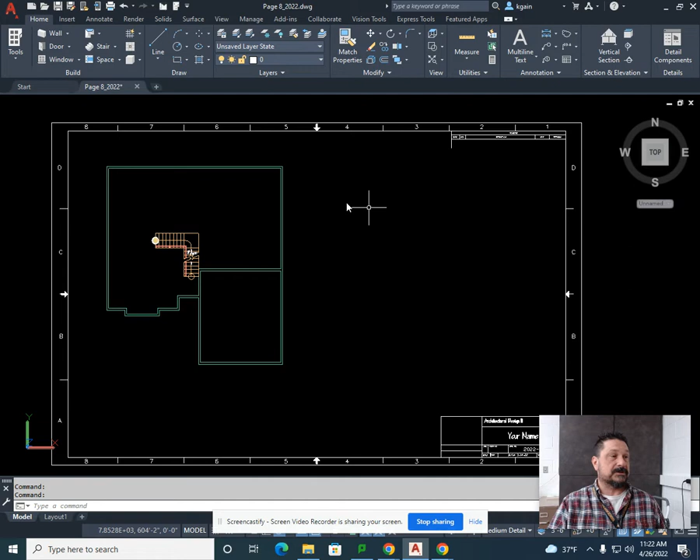So what we're going to do is go into our tools, and in the design tab, or right underneath the design tab, are your walls. So what we're going to look for is our standard 8-inch concrete block wall with a 16-inch footing, or basically the sidewalk that's going to walk around the perimeter of your home that holds the foundation. And if we scroll down, we can see it right here.

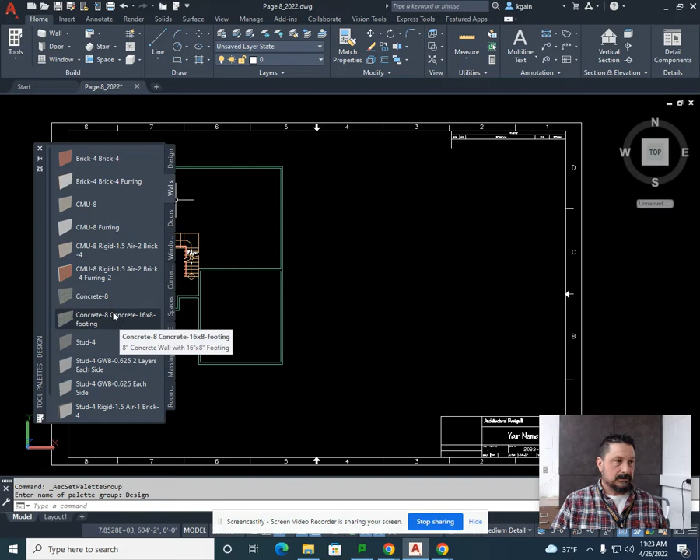Now, as I pointed out the other day, it's also going to be in your content browser if you're more comfortable using the larger pictures: the Imperial, into our walls, and then our concrete masonry units. And I do believe we were scrolling through and hit page 4 when we finally found our 8x16 footing with the 8-inch wall. So we're going to select that and hit insert in the drawing.

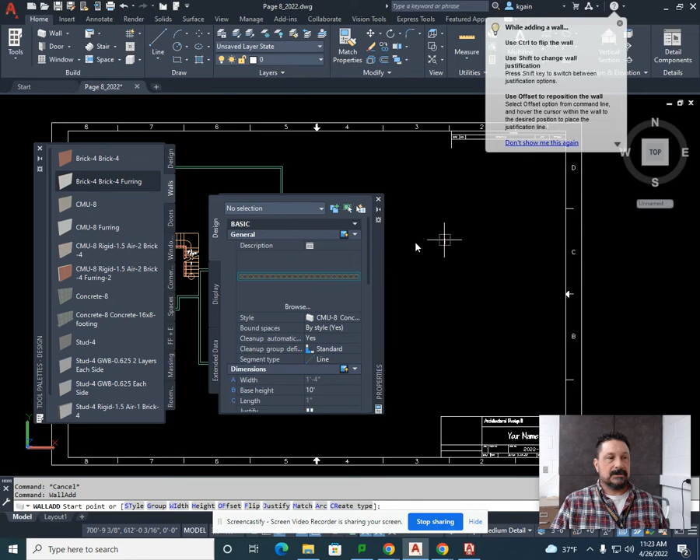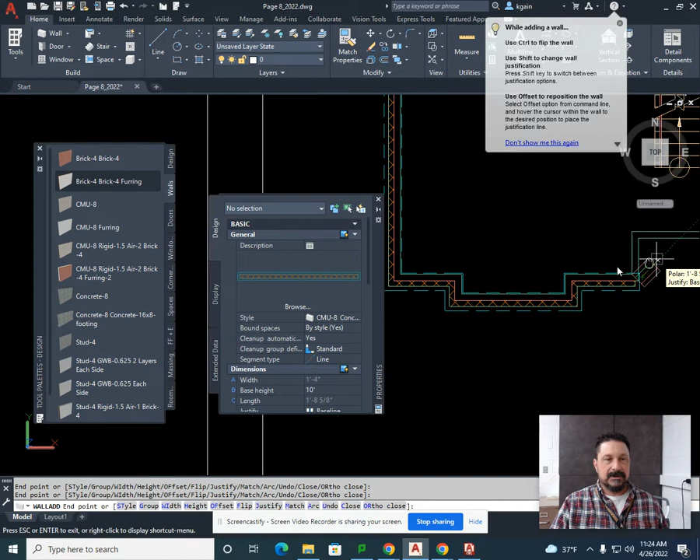Now I'm going to scroll over here and I'm going to trace the perimeter of my home minus the garage. So we went kind of through the garage and determined that really there's no basement underneath the garage. So I'm going to continue this perimeter just for my home. And just like any wall, you get close and you drop and it cleans up.

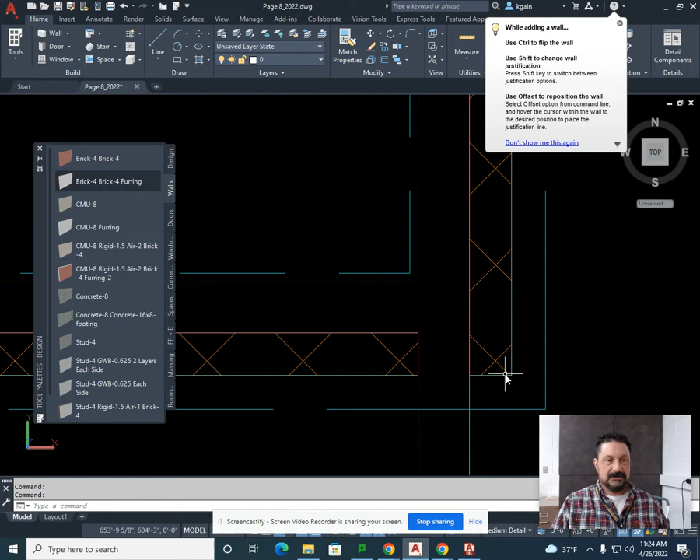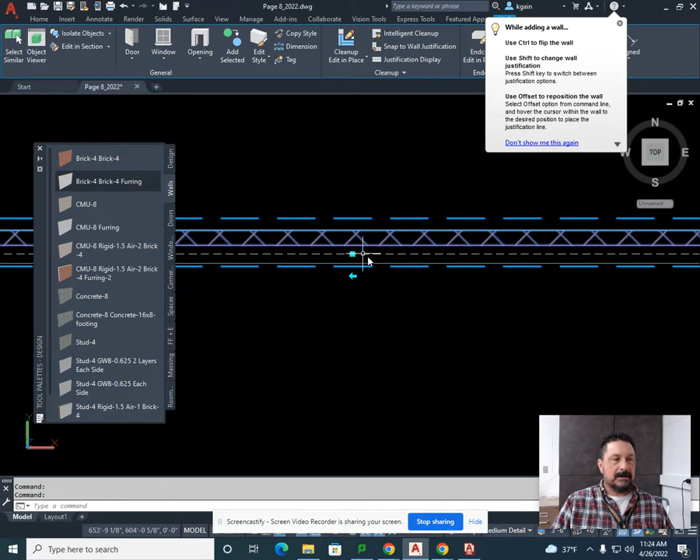Now, it's not perfect by any means. We're going to have some adjustments because the walls are not setting perfectly on top of that block. Your walls should be 6 inches and your foundation wall here is going to be 8 inches. So those are going to need some minor lining up. If they're off a little bit, that's okay. A long time ago when we did the cabin, we had grabbed one of the grips and we dragged it down and we entered a distance.

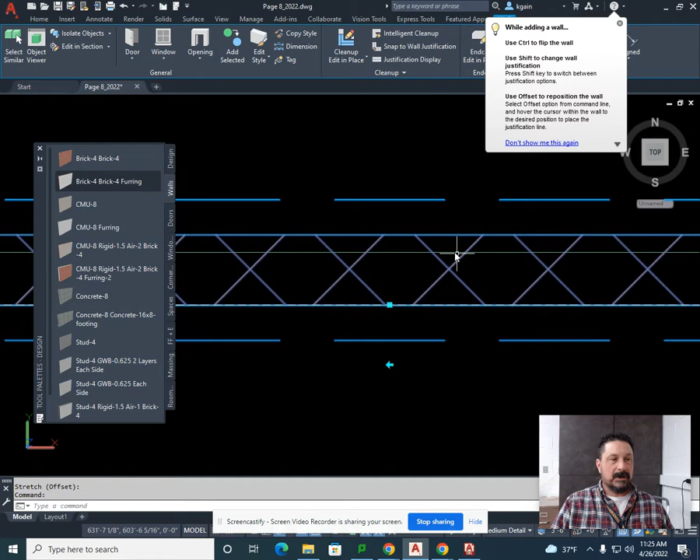So we need this wall to line up with the outside of our 8-inch wall. So it's the outside that's going to be flush, not the inside. So if I click on this and I drag my wall up and I put it on the outside of my wall, you can see that, yeah, my foundation's sticking over. I don't want that. I want it the reverse.

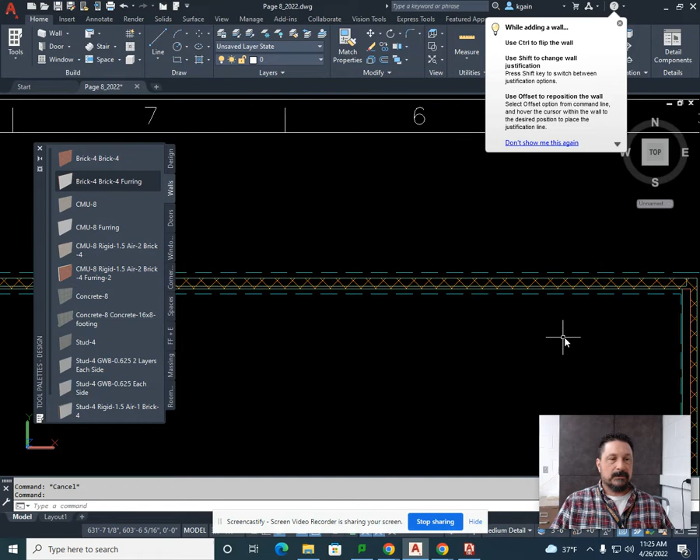So unfortunately, because the grip is on this side, I'm going to have to drag it down and manually type in the number 2 for 2 inches. You don't need the inch symbol, and select enter. And now it's flush with the outside perimeter of the home. And you're going to continue that process through each of your walls.

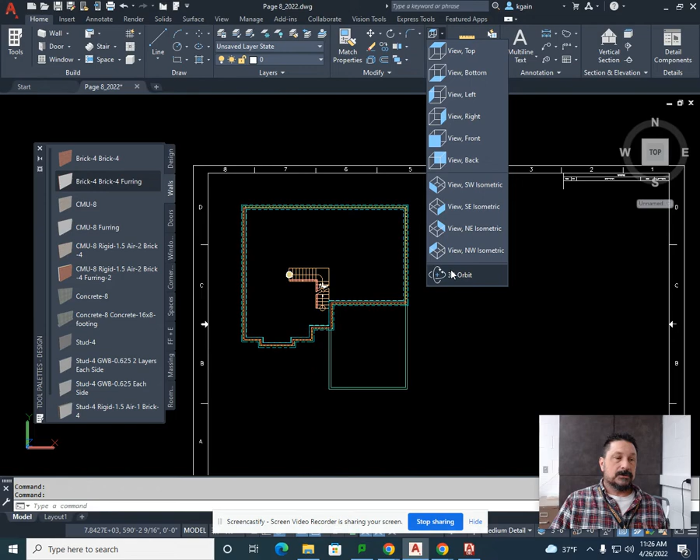So if I click on this and bring it back into my wall and then back it up and enter 2, now my home wall is flush with the outside of my foundation. You do that for all the other ones. After you're complete with that, you can go to a 3D orbit and kind of see what it looks like. Obviously, it's kind of stuck within the walls, and we need to drop it down a little bit just for our viewing purposes right now.

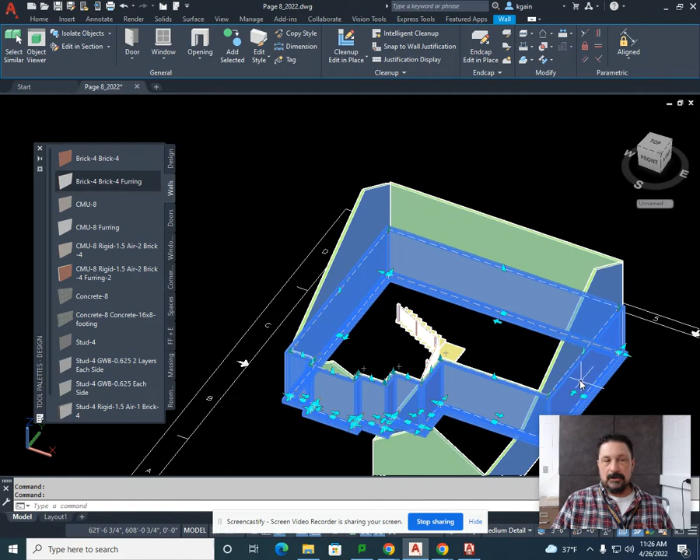So I'm just going to grab all these, and then I'm going to adjust those heights. And if you don't hit them all at once, that's okay. And I'm just going to go to a regular old move, click on this corner, and I'm going to move it all the way down, even with the outside of my home.

Now, if I go to an orbit, you're going to be able to see that it's resting on top of a foundation, and now I have my basement wall. Like I said, keep the stairs. We'll probably end up forming stairs going to the basement from this side, going down one way or the other.

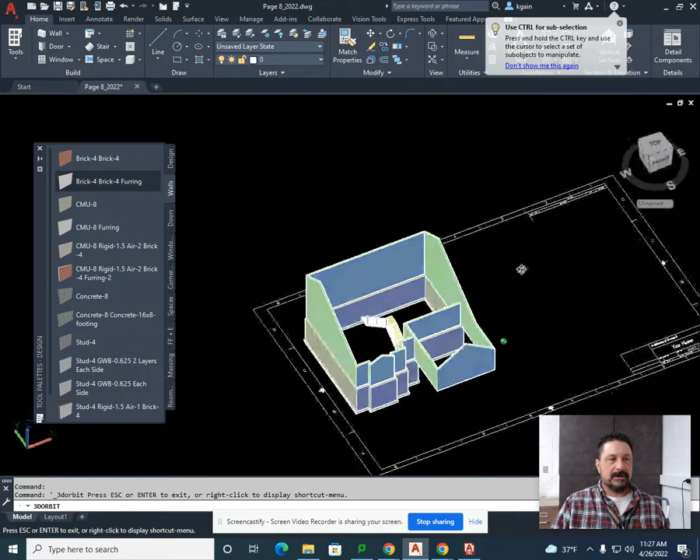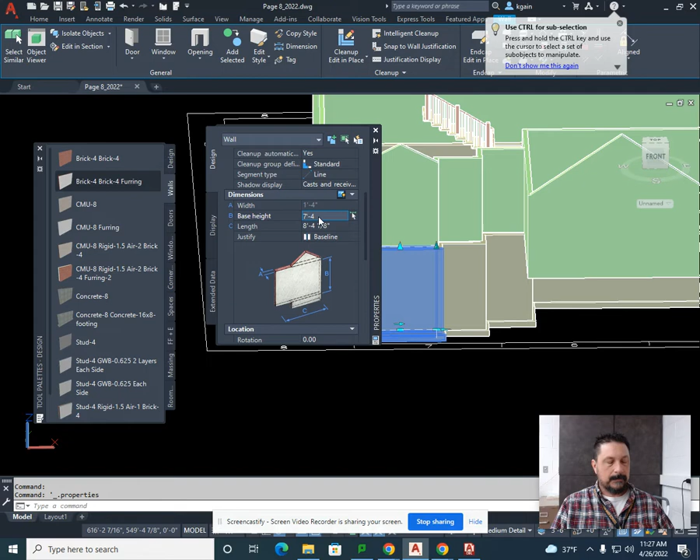Now, the walls themselves, if I double click on any wall, the properties come up, and you can see that we're looking at a base height of 10 feet for a foundation wall. That's pretty darn tall. Okay. If we went the standard basement height, and I mentioned this the last time we met, it is 7 feet 4 inches. And then I'll have to obviously readjust the walls accordingly to meet back up with my home. We'll most likely get rid of the home walls.

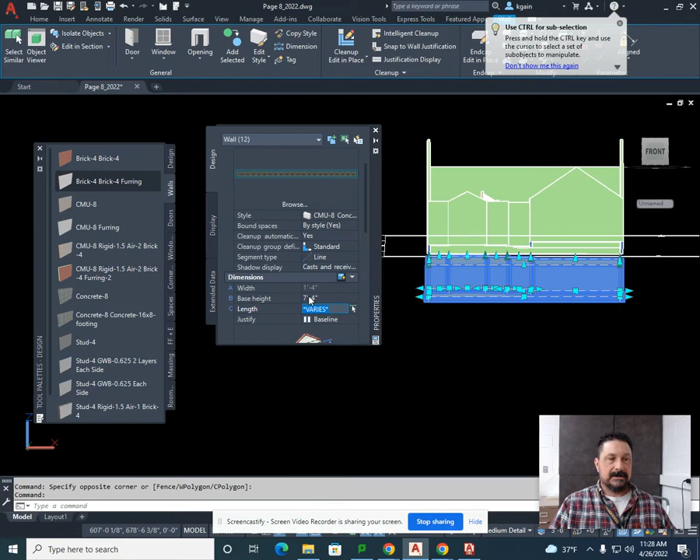So if I went to an orbit or a straight on front view, and I highlight all the walls. Now, mind you, one of them I changed. So when I scroll down here and it says base height varies, I'm just going to click in that field, type in 7 feet dash 4. You could include the inch symbol if you wanted to, if you feel comfortable. I'm just going to keep it at the 4 and select enter. Escape. And they're all 7 feet 4 inches. That's your standard basement height. I would suggest doing that only because for our purposes, it's going to be a little bit easier to form stairs going into your basement.

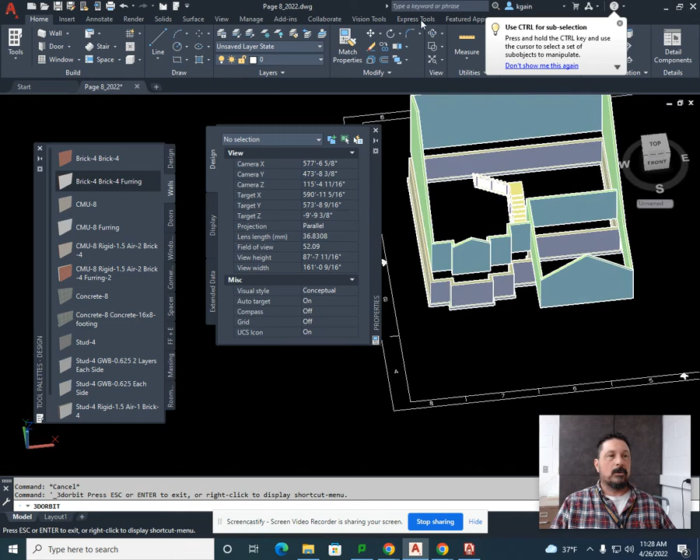Right now, I'm not going to raise these up to the level of my home. I'm just going to go back to a top view and focus on my garage. We talked about how a garage doesn't really have a basement under it. When you excavate or when you dig for a home, you do want that large cavity for your basement for multiple purposes. Things to obviously have some type of living area. If you ended up having an older home, yeah, you got a short basement, but the accommodations that were necessary down there were your furnace, your hot water heater, all your duct work, your pipes, your electric system, your service panel, and so on. So all that had to be housed somewhere, and that somewhere was in that cavity we call a basement.

And of course, over the years, it was, well, we can make this more of a livable space, a rec room maybe, and kind of shove everything off to one side when it comes to the hot water heater and furnace and so on. So this is an important step of having the foundation, having a basement ready to go, because when we meet next, we're going to start talking about where the water heater goes, where our furnace is going to go, where our electrical is going to be run from throughout the home. So there's our foundation walls.

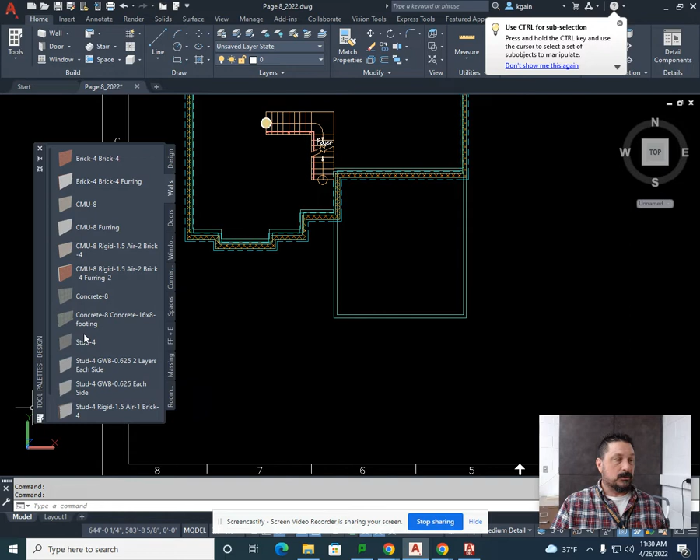Now, with the garage really not being much of anything, what we're going to do is still put a foundation wall, but we're not going to go that 7 feet 4 inches into the ground. But we do need to go into the ground. Now, this time I'm going to use my tool palette. I'm going to come back here, same wall, 8-inch, 16 by 8 footing. And I'm going to drag just around the garage. And once again, don't have to be perfect the first time. We can make those adjustments as we go.

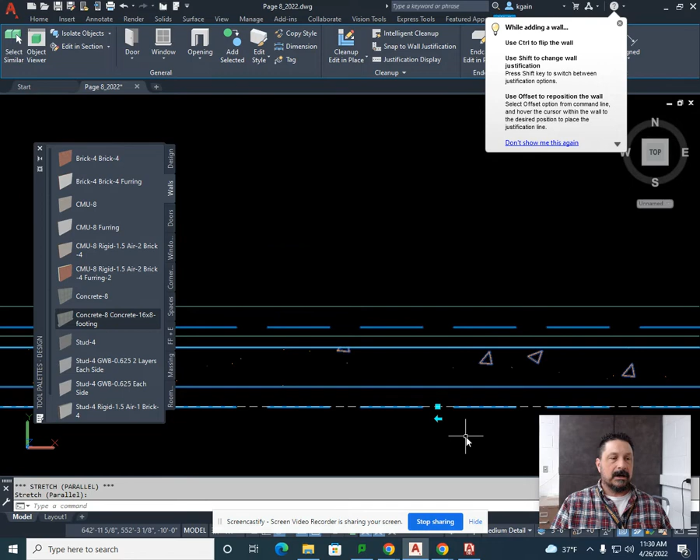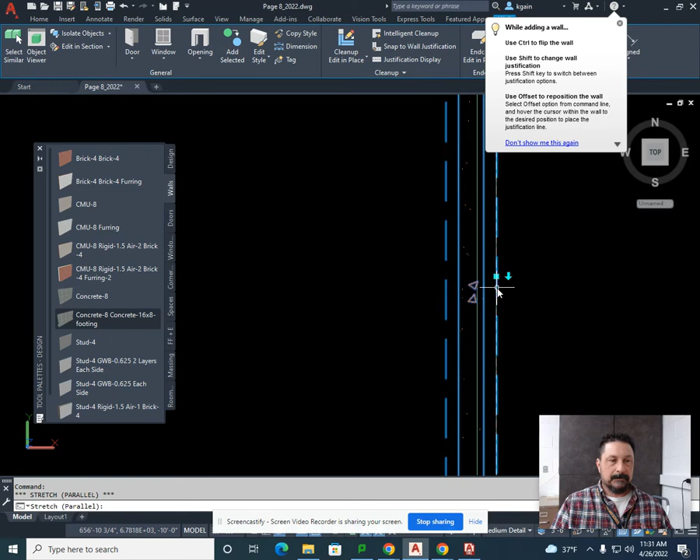Obviously, this would be the same thing. Drag it out, enter your distance of 2 wherever your wall lies. These are justified, looks like, on the outside. So I got lucky with that one. Ooh, that's my wall. So I'm just going to drag those out. Nice. Missed that one. No, this is justifying from the footing, so I'm going to have to drag that out too. Okay, not sure why that was the case. But anyway, regardless, what we're going to do is change these then to a minimum of 4 feet high, and then raise those walls up.

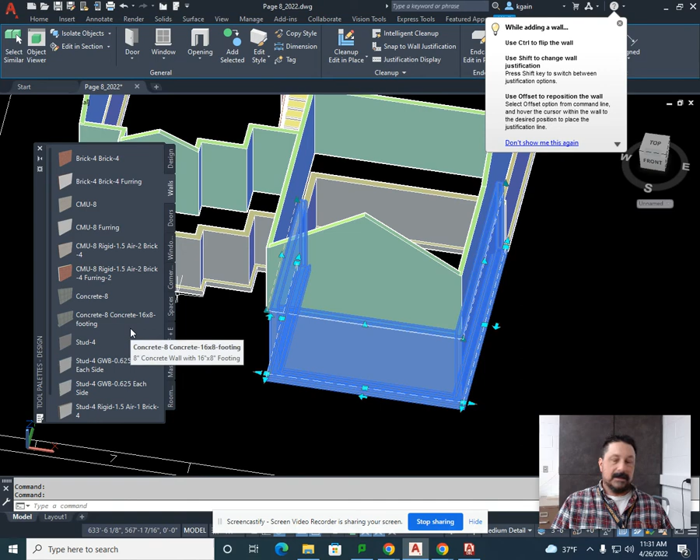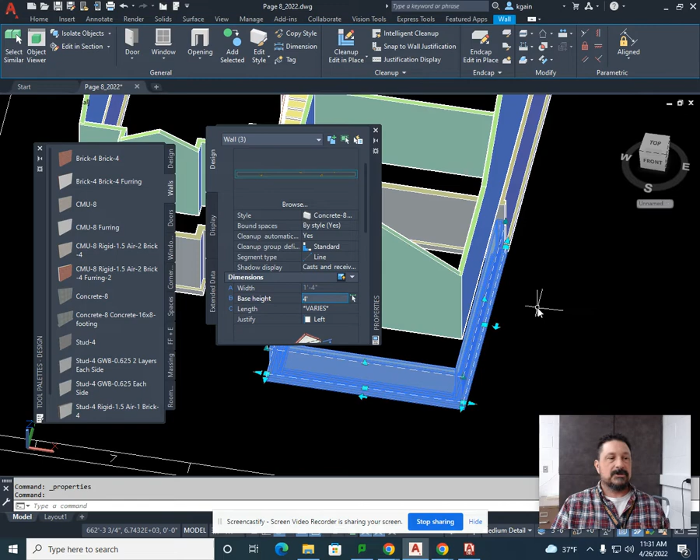So if I go to my right-click properties, or I could just double click on one wall and scroll down, base height now is 4 feet. Now, why 4 feet? 4 feet is the requirement in the Midwest for being below the frost line. With the earth shifting when it comes to ice, snow, heat, and so on, we are below to a point with your footing and foundation for your garage walls that will not allow shifting or cracking if it's 4 feet.

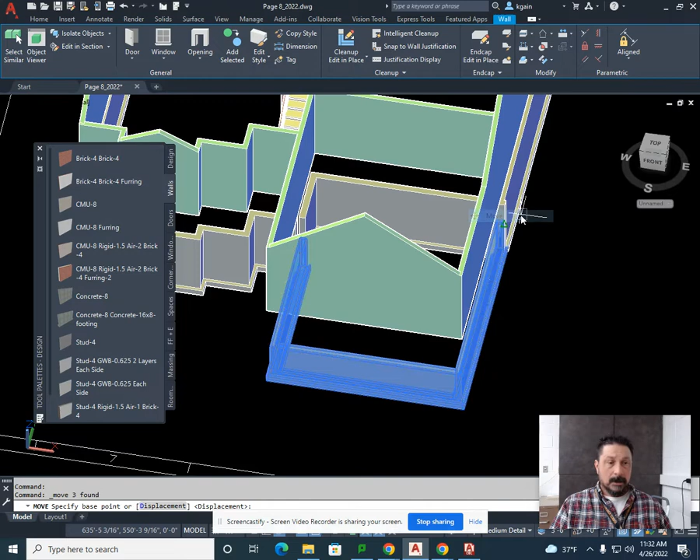This is the same thing when it comes to a deck. A deck you also don't want, and I'm just going to shift it up. It might need some adjustment later. But a deck is the same thing. You do not just put a deck on the ground. You do put posts or a foundation or some type of concrete to suspend that deck above your property. So this is the same concept, is that we have to have some type of footing, some type of foundation to support all the weight that comes with your garage, specifically the walls.

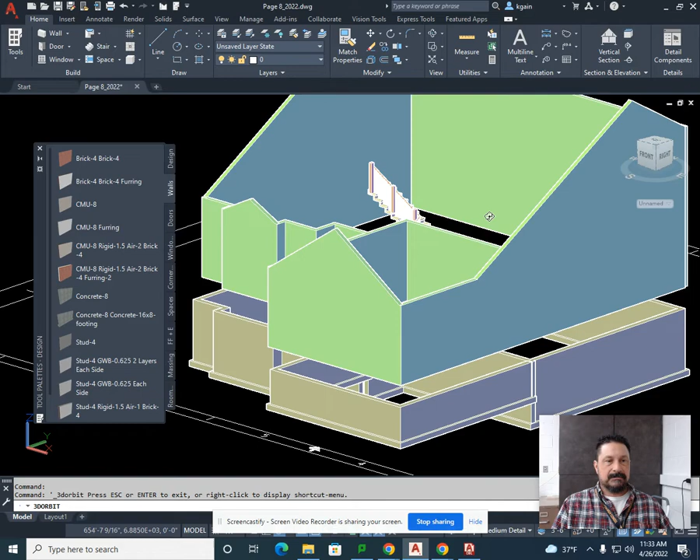Within that area, obviously, you would pour a garage slab right over your gravel base, and that's where you park your cars. But there's never any real true basement, so there'd be a lot of dirt in here after the excavation. Get the dirt back in there, backfill, get the gravel in there, pour your garage, and then obviously we start building the home itself. So there is your foundation for the home.

To move on, and you can pause this video anytime you want to work, but I would expect you to have most of this done within those 85 minutes allotted.

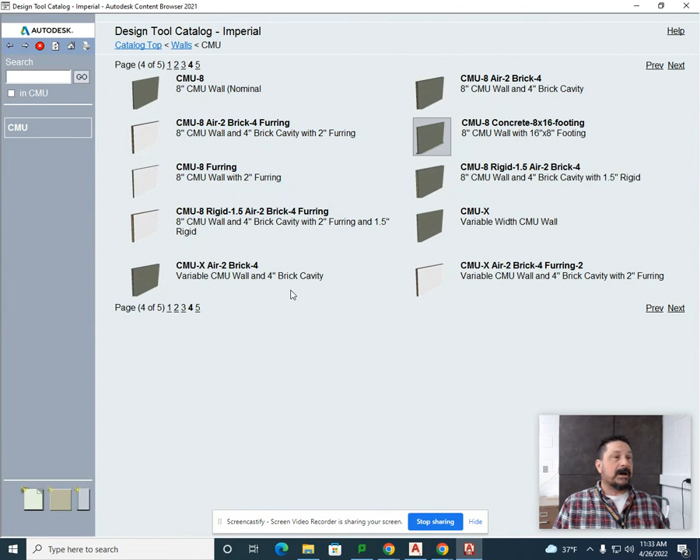This is going to be a little bit easier. I'm going to go back into my taskbar here and open up my catalog here. Go back to Home, Imperial, and scroll down through here, and you're going to see a lot of different types of things that we really haven't gotten into yet when it comes to the structural component. You can see that there's going to be things like electrical, okay? Things like our heating, venting, air conditioning controls, and our air distribution, and so on.

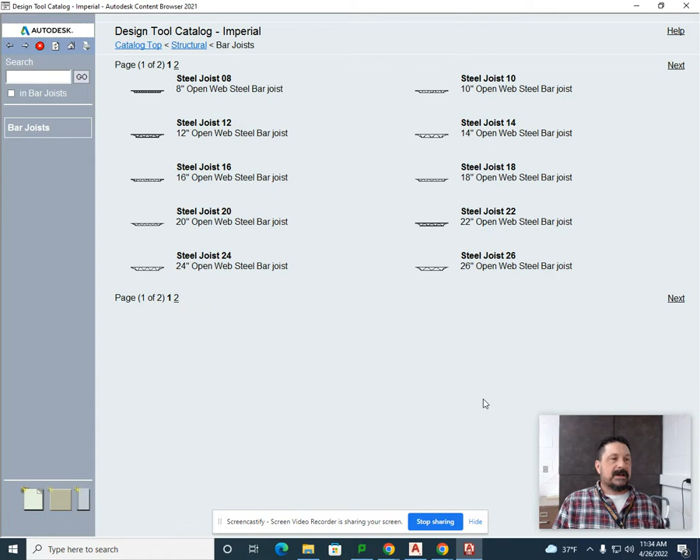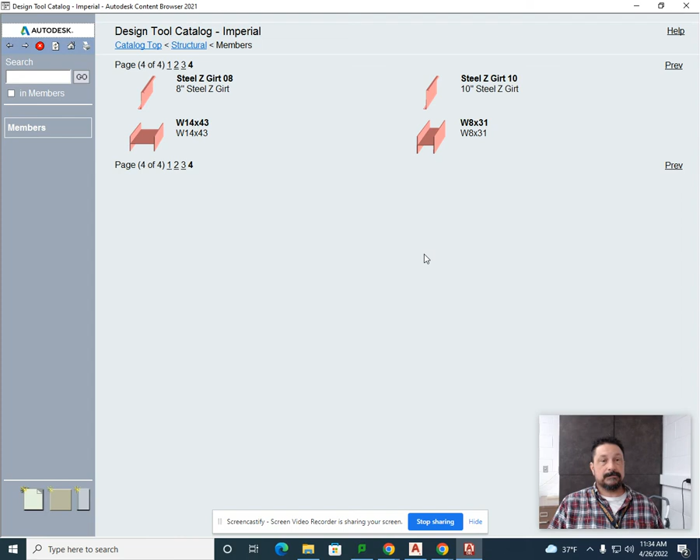If we get into our structural, well, let's just take them one at a time. You can see that there's joists in here, and this is more of the commercial end. If we back up and go into our members, you can see that there's going to be things like beams and columns or bollards, other pilasters or columns that might hold up a roadway or a basement wall. And we can get into things like our beams that we need for our structure. So there's a lot of different things within the tool catalog.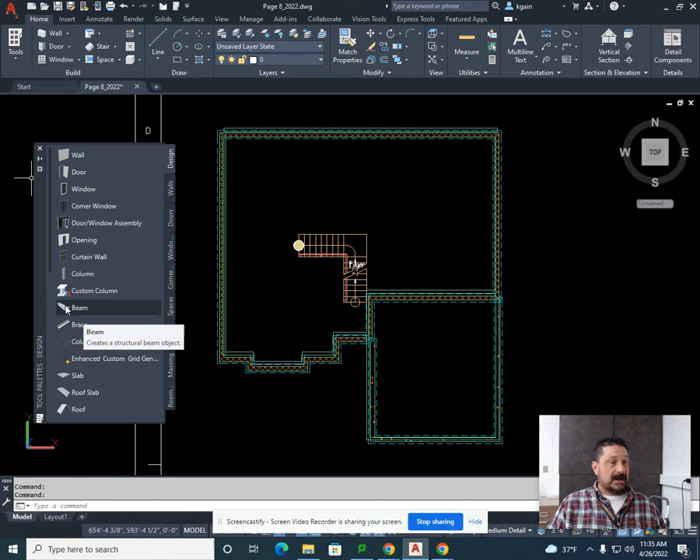We could also use our little tool palette here, and you can see through the design here that you're familiar with, where it says wall and door and window and so on. Might be a little bit easier to follow that with a beam. Now, when you put a beam in your home, just like the outside walls, your outside foundation walls, those are supporting the outside. If you don't want a big bow in your home, you need some support. And that support comes with your beam system.

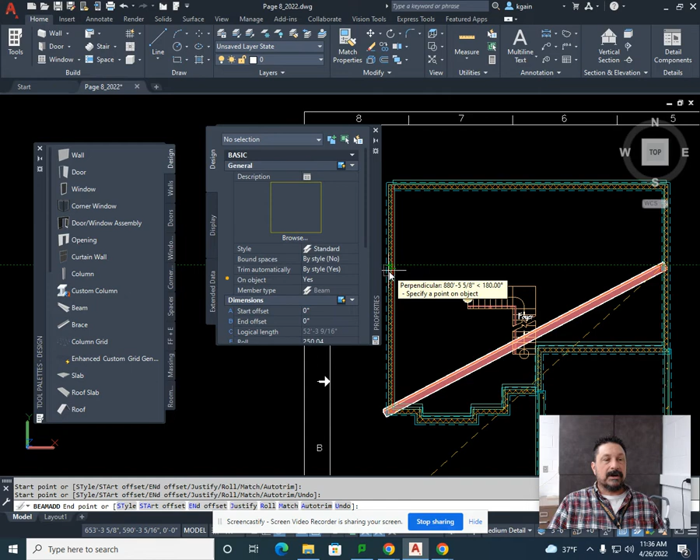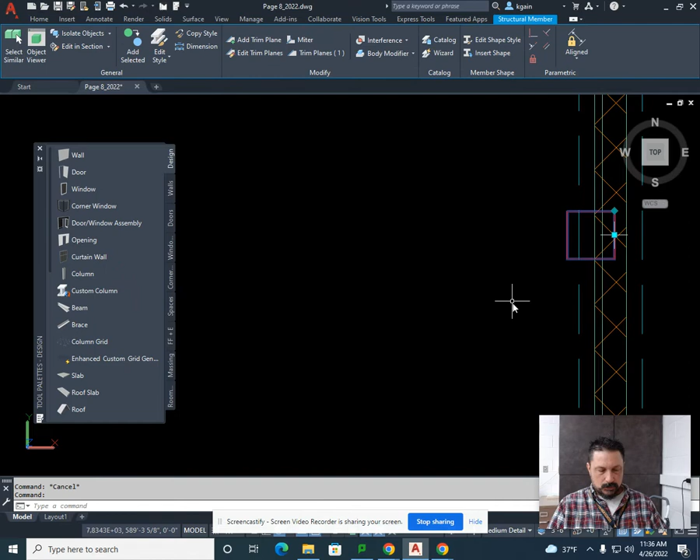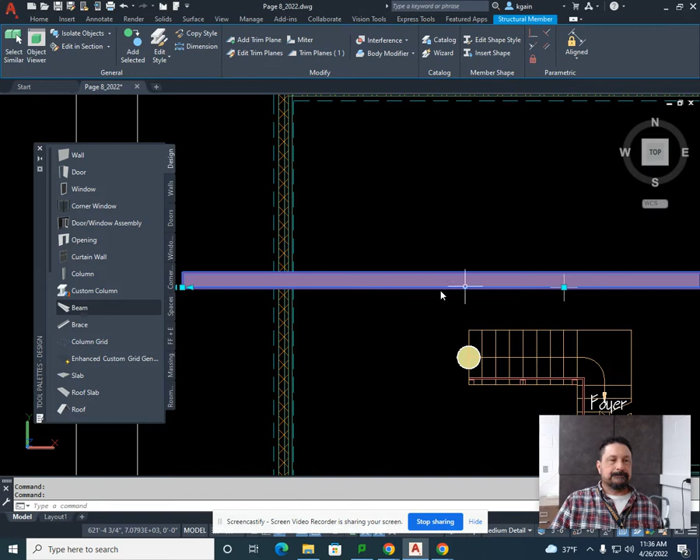If I select beam and I find the longest stretch of my home, which in this case it's going from here. Sorry, I should have clicked and held. Click, hold, and drag all the way across. I very well may have my perpendicular. No, I do have perpendicular on, and it's still making it wiggle. I'm going to just drag it. It's not going to go. I think I clicked on the end of this beam, so I'm going to go back to my beam, go back to my midpoint, and drag out. There we go. So all I did was click, hold, drag, and I'm going to bring this back.

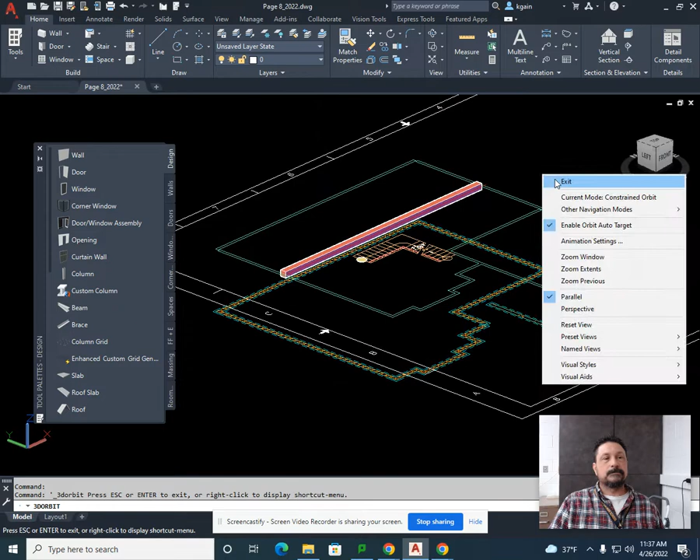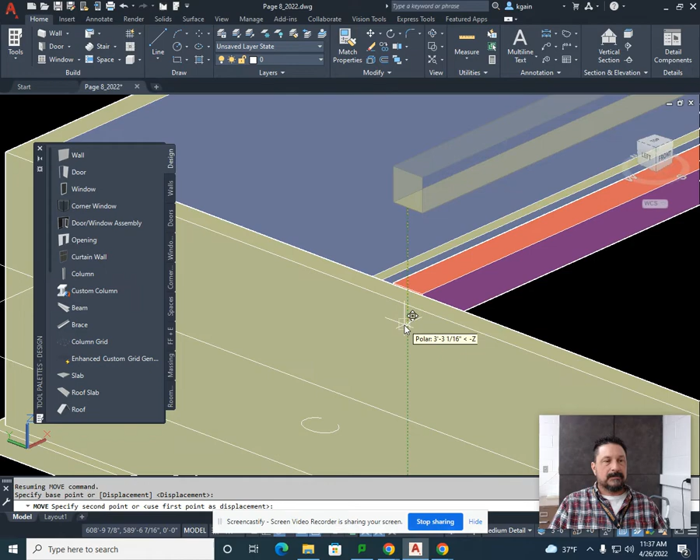I apologize, I don't know what happened there. I know I got a couple here that I have to delete. Now, if I were to look at this in 3D, I'm going to get rid of my walls. But make sure you have everything lined up with yours. I'm going to keep my stairs in there. That beam system is going to be supporting everything that you have above it when it comes to the middle of your

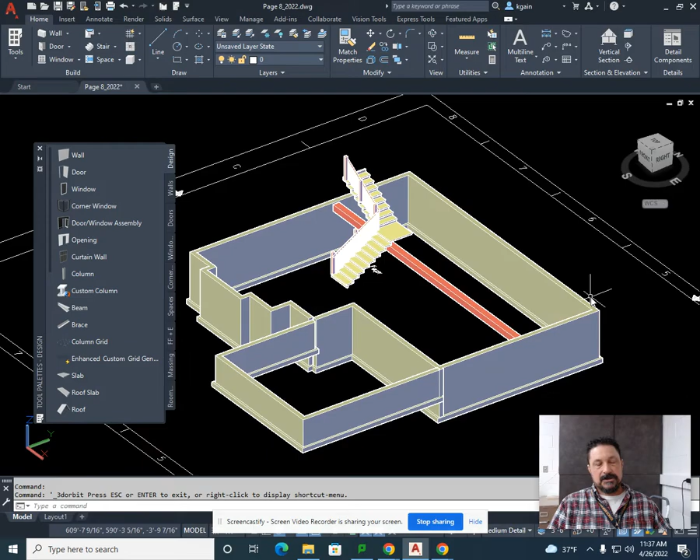home. So anybody that has taken the construction course knows that there's going to be a floor frame. Going from foundation wall to foundation wall, there's going to be what are called floor joists going across, supported by the beam system. In construction class, we don't have that. We have a floor underneath, but you do have to support the middle of the structure. Now, in turn, we have to support the beam system with our columns.

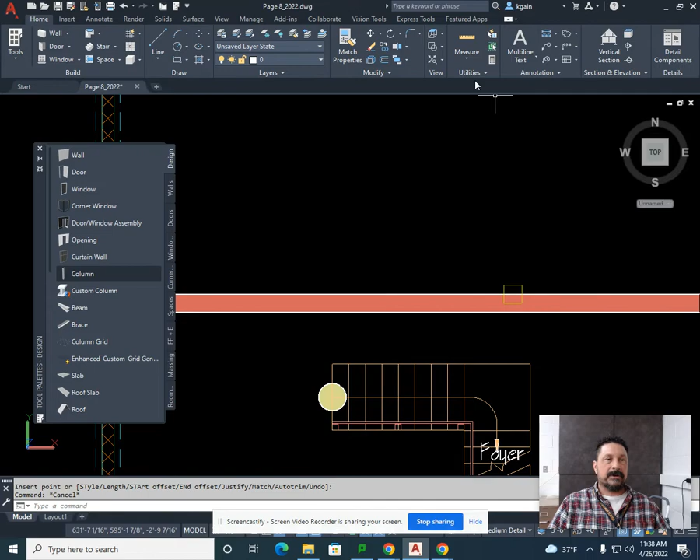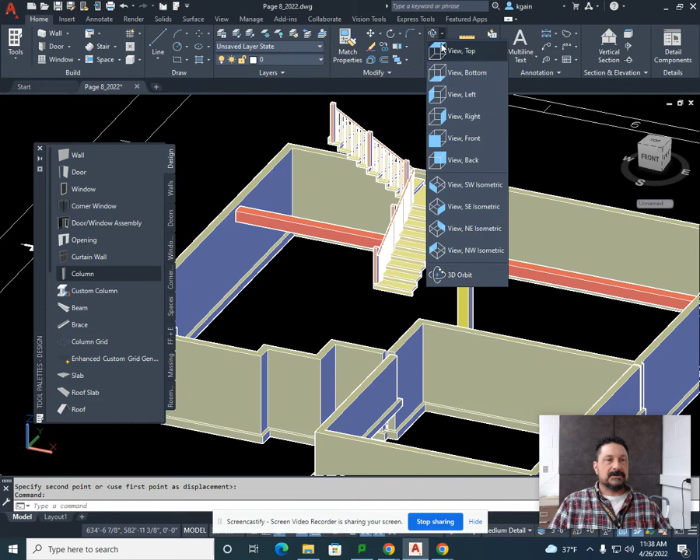So if I go back to a top view, I'm going to start with a column, and fortunately, I can just select the middle. I'm just going to pop one in. I'm going to go back to a 3D view just so you can see it. Of course, once I stuck it, it's stuck from the bottom, so I'm going to move this back down. I'm just going to grab the middle and move it back under. It's going to take a little bit of fancy footwork to get it centered out. Okay.

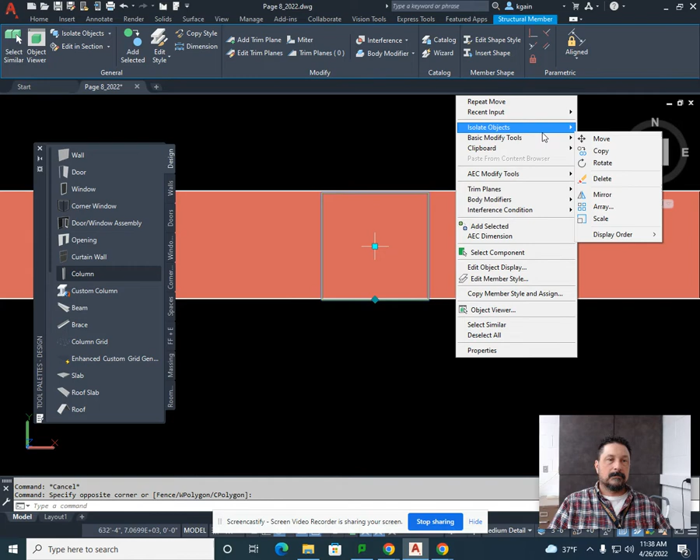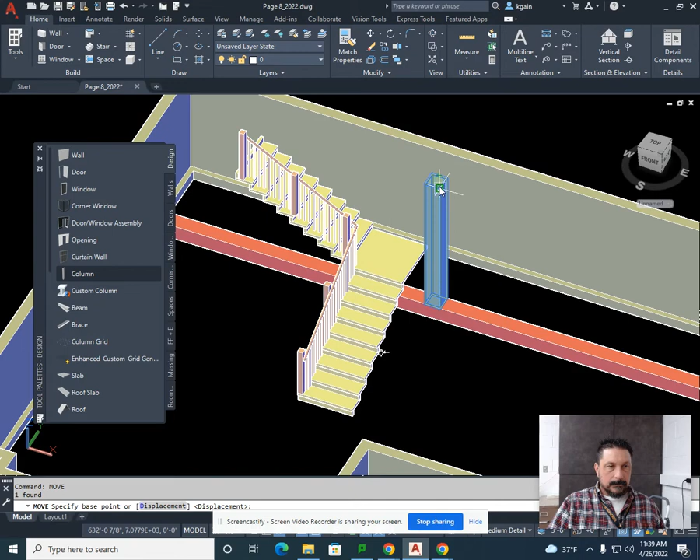Oh, my, yeah, of course that's in the way too, my little screen sharing. So I'm so sorry. Giving yourself a foot. Yeah, I accidentally. Yeah. Fingers slipping today.

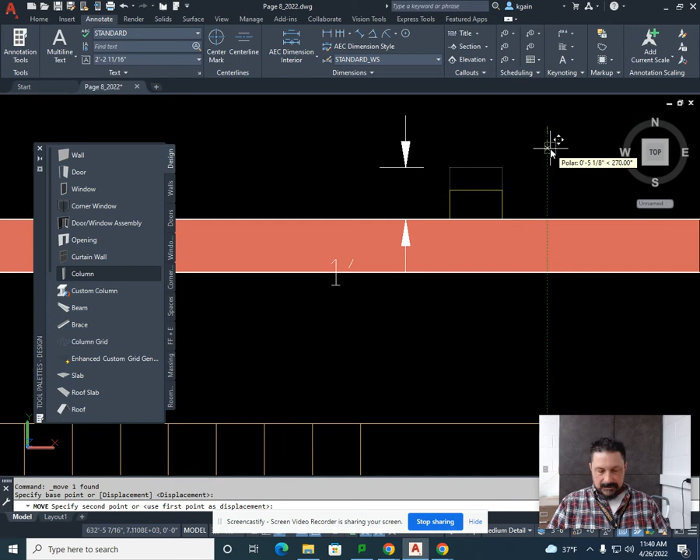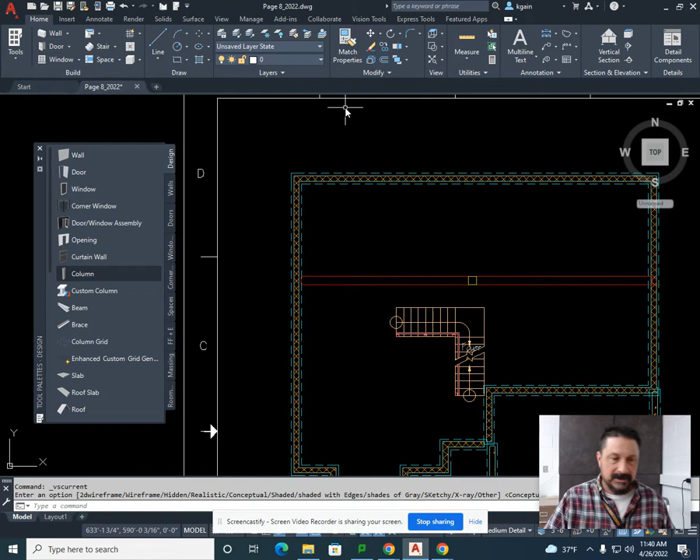Okay, so now that we have our posts finally underneath there, I'm going to go back to a wireframe just so you can see where the post is. And I know, once again, it's an odd number, very odd number, but 9 feet, 3 inches is going to be the distance between those columns. So if I just take a line, 9 feet dash 3, enter. There's where my next column is going to be.

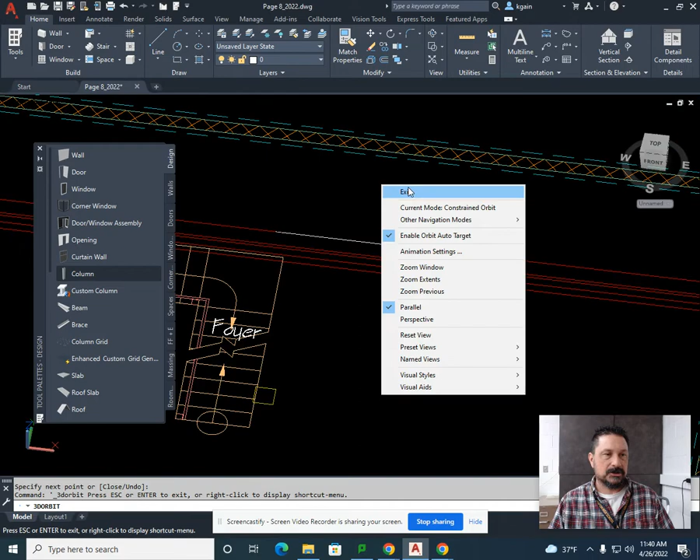So what I'm going to do to make sure that these stay on the same plane, I'm going to bring this down to the level I need. Or if you get fancy, you could do like a mirror or something.

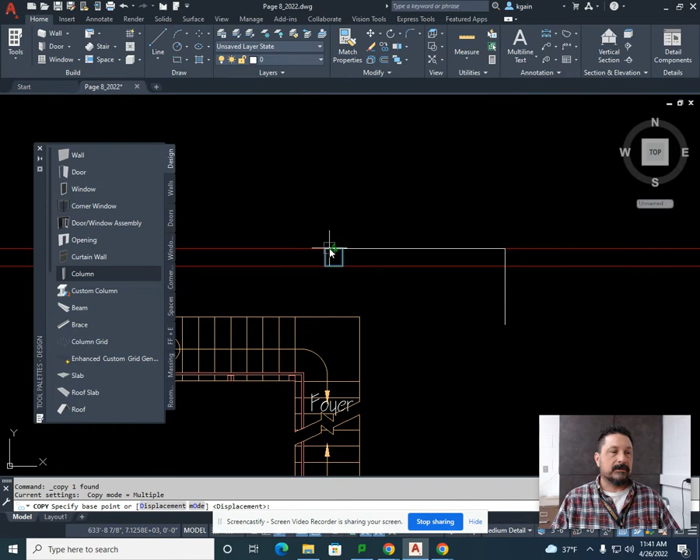And copy it over. There it is. Or once again, if you wanted to do a fancy schmancy mirror, I guess I could grab this one, go up to Home, go underneath Modify, go to my Mirror, select the midpoint, flip it around, enter.

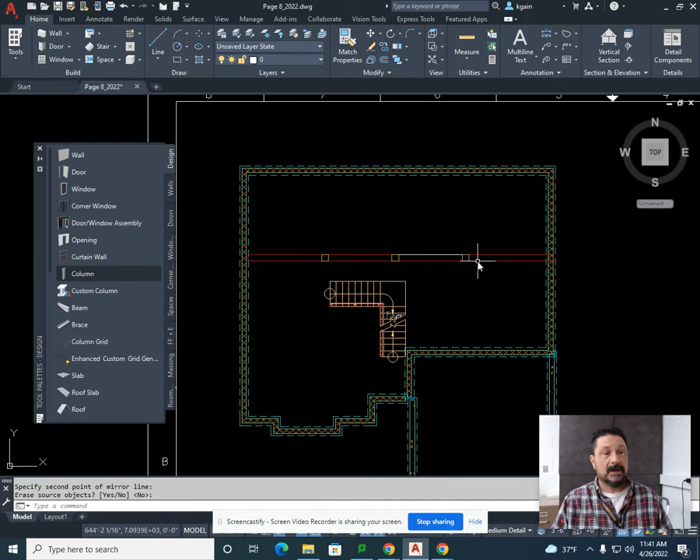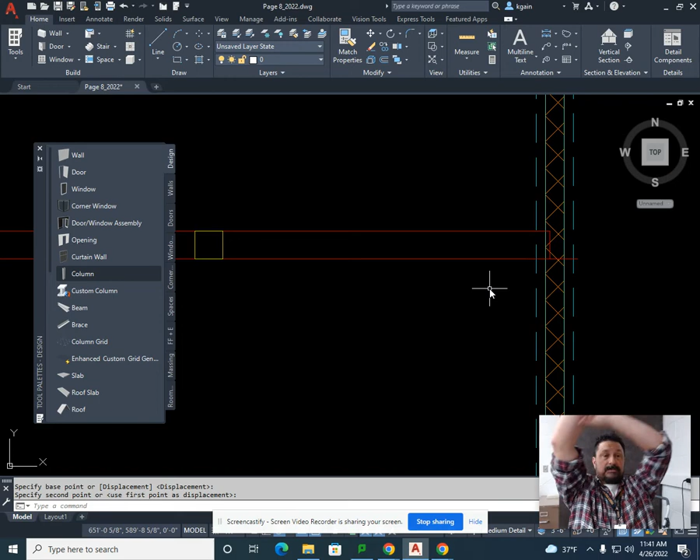On the side, for me, it's very possible that I might need one more. However, with this and the support of the beam, I will most likely add what's called a pilaster, or a very small bump in the concrete, to also in turn support the beam. Some of you, depending on the construction technique, would have, if you look in your basement, how that beam sets. There could be a notch in the concrete foundation wall. There could also be, once again, what's called a pilaster, or a little bump out of the wall.

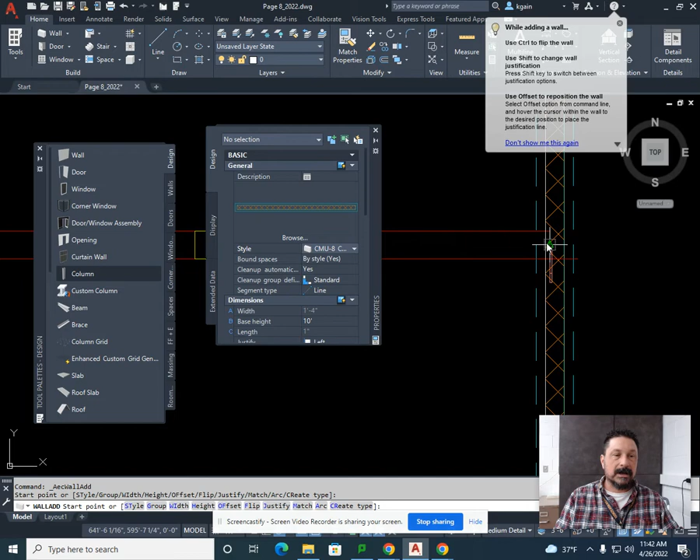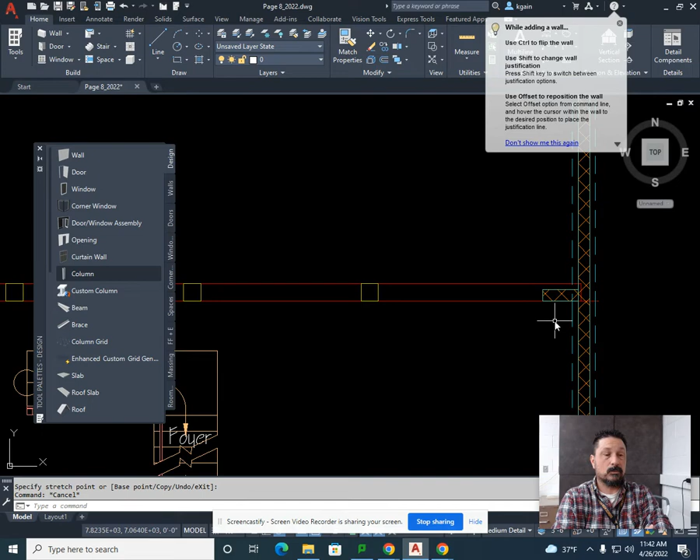And I'm going to change my wall style to my concrete masonry unit and bring out, and my footing is not showing up. But that's the gist of a pilaster, is to be able to pull that out a little bit and support that beam. So that kind of doubles as one of our columns, one of our posts in the basement.

So very similar to, and I'm just going to delete this just for a minute, the stairs. But if you were to walk into your basement, you would be able to see, and looks like the mirror didn't work too well, or the copy with those other ones. So yeah, we have to get those down. You'll be able to see all those posts, columns, and so on in your basement. Okay, you don't want to kick those things out. Those are definitely a support system for your home.

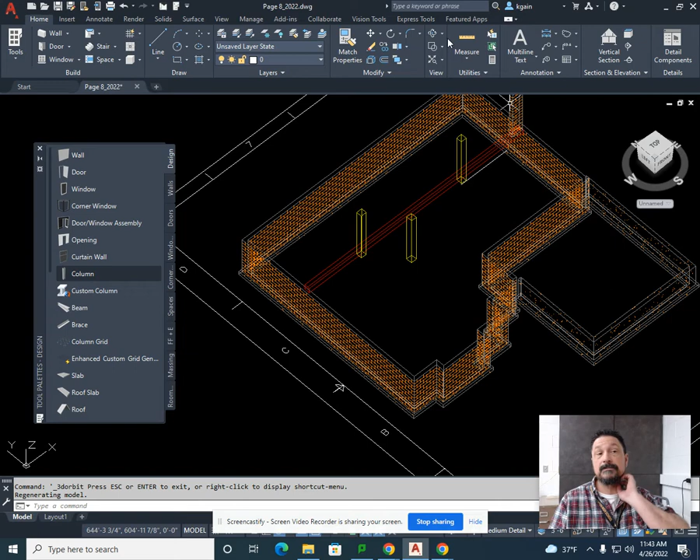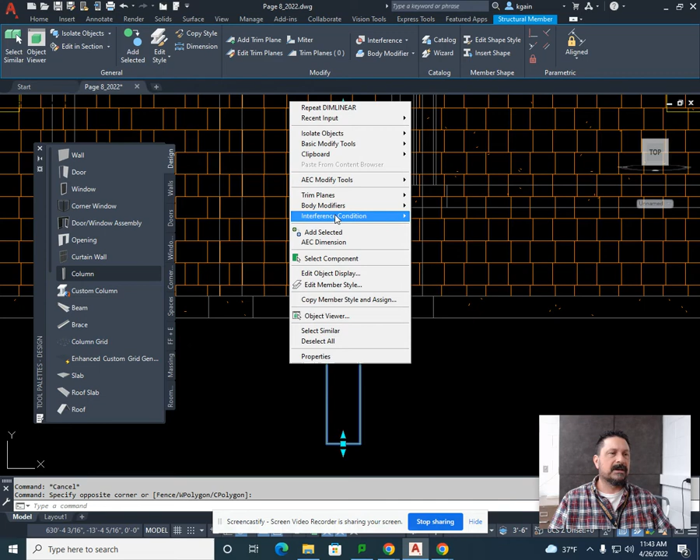So just to fix that, just quickly, and yeah, that's exactly why my footing wasn't showing up. That was going haywire also. Don't forget to use some of those little tricks I've taught you, some of those techniques. Like this, I can already tell, I don't know why it dipped, but it's a foot down. If I highlight, right mouse, Basic Modify Tools, Move, click in my blank screen, select 12, and bring it back up. I can also see how far of a distance I am away from here to the beam. Looks like I'm 9 feet. Keep that in the back of my head.

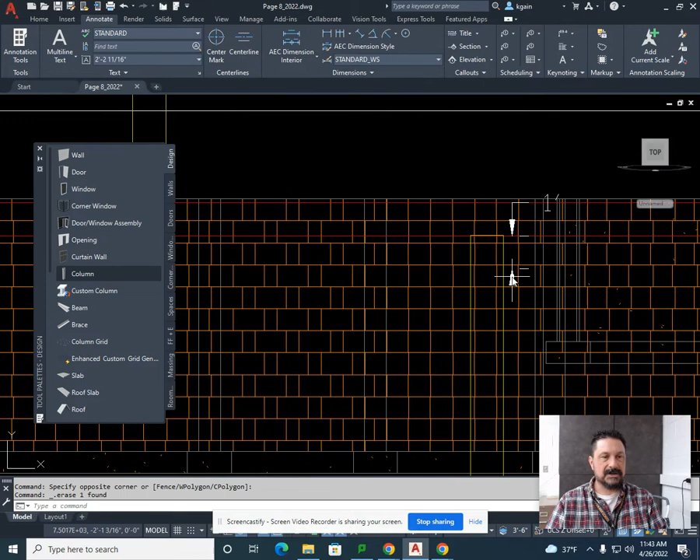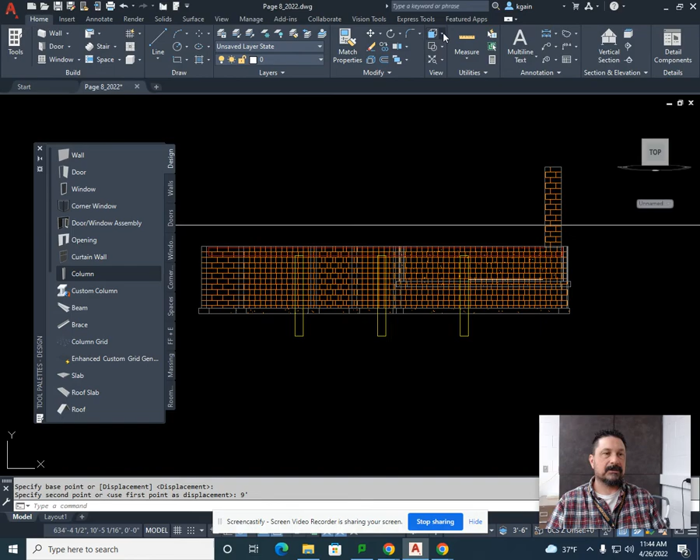Highlight these two, right mouse, Basic Modify Tools, left click on Move, click anywhere in the blank screen, drag straight down, type in 9 feet, enter, and there they are. Now we can kind of visualize those a little bit better. There we go. Okay, and then yeah, I bring the pilaster down also.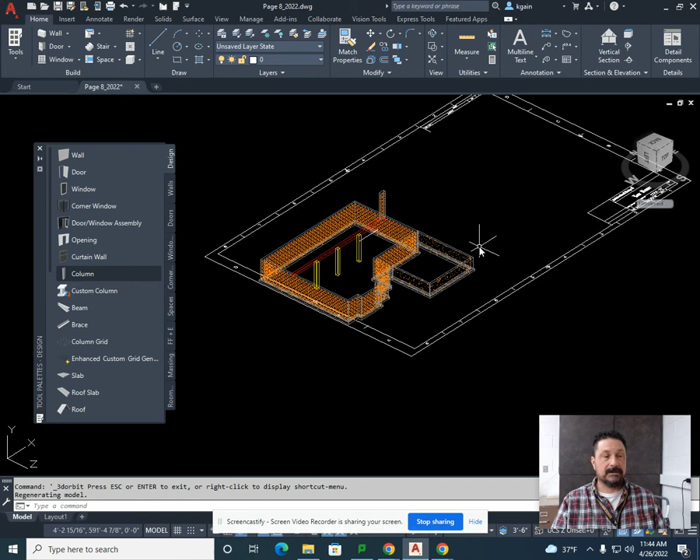If you have any questions, obviously keep them in the back of your head until Thursday, and I will be returning. But I do want to see page 8. I'm going to walk around on Thursday and see how page 8 is going, and hopefully you're this far or further. Some people still need to submit other pages up to the point of page 8. Please get those things in.